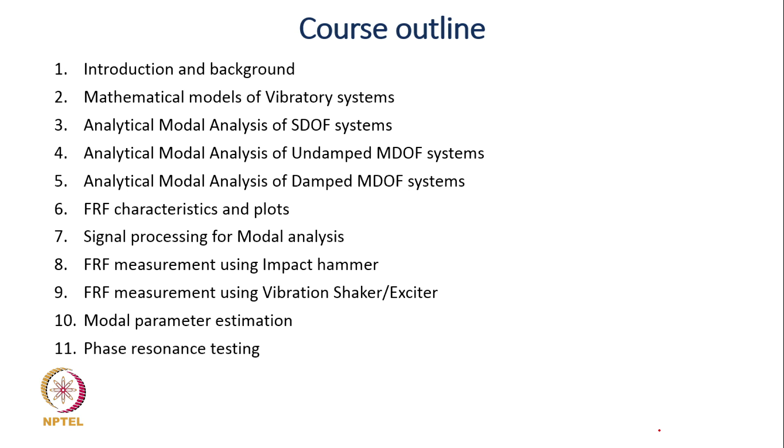Then we will look at how FRFs can be measured using an impact hammer. Then we will look at FRF measurement using a vibration shaker or exciter, and then how the FRFs are curve fitted to obtain modal parameters. So we will look at modal parameter estimation using frequency response functions and impulse response functions. Depending upon the available time at the end, we will also briefly look at phase resonance testing, operational modal analysis, and some applications of experimental modal analysis. So this is broadly the topics we are going to cover in this course.

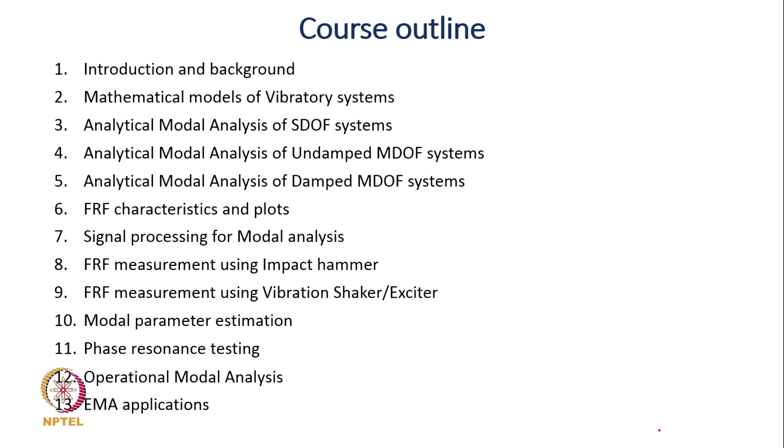So let us now address the first question, that is, what is experimental modal analysis? In order to understand what is experimental modal analysis, I think we need to first understand what are natural modes of vibration.

What are natural modes of vibration? The natural modes of vibration of a system are the principal or distinct ways a system can vibrate naturally with harmonic motion. So, the system can vibrate naturally or freely in a way which is not a natural mode of vibration. Free vibration which is not a natural mode is possible, but there are distinct ways in which a system can vibrate freely with harmonic motion.

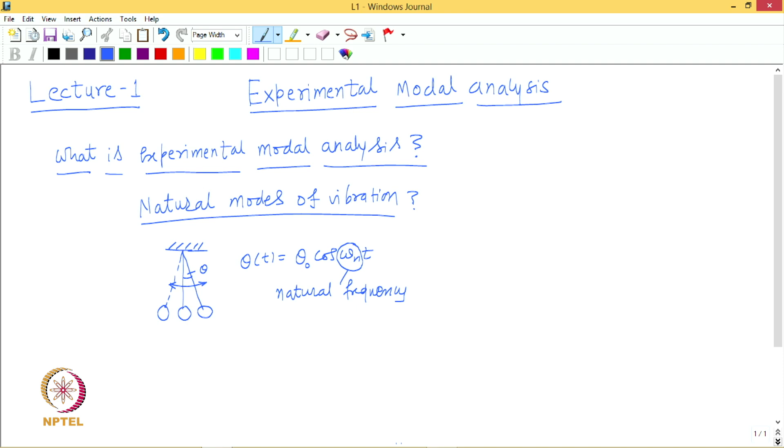Simply because the pendulum once disturbed is no longer excited further. So, it means it is under free vibration, and the frequency in this state is the natural frequency of the system. Now, this pendulum requires only one coordinate theta to specify its displaced configuration, and therefore, this system is referred as a single degree of freedom system. And this is such a system, and any single degree of freedom system has only one natural frequency, right.

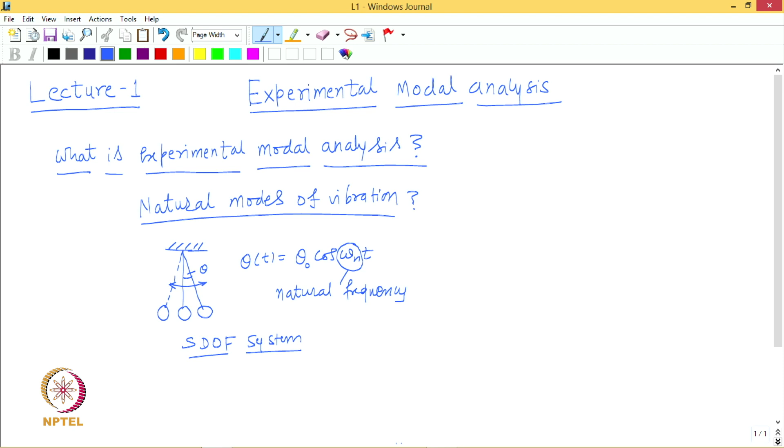Let us take another example. Let us take a system like this, in which we are connecting two identical pendulums, say by a spring like this. Okay, so there are two pendulums which are identical, and we are connecting it by a spring. Now, this system has 2 degrees of freedom, because the displaced configuration of the two pendulums at any point of time requires two coordinates theta 1 and theta 2 to be specified. So, this system has degree of freedom 2.

Now, this system has two natural modes of vibration. One of the natural modes is this, in which the two pendulums are displaced by an equal amount, say if I call it theta naught, theta naught. So, in this case this system vibrates with natural frequency omega n1, right. So, when the pendulum system goes to the other extreme of the cycle, they occupy a position like this, and they keep on oscillating like this.

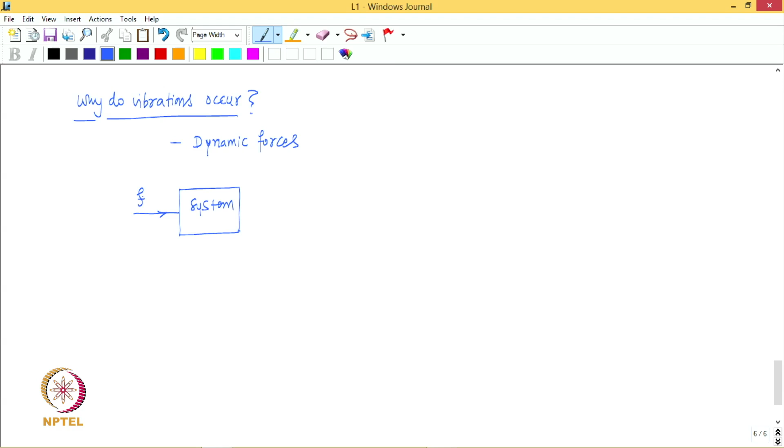Let us again look at the input output model of a system. Let us say we have a force f on this, and if the force is static, which means that it stays constant with time, then the displacement it produces under the steady state is also constant with time.

Okay. It is also constant with time. Of course, there may be some initial transient which we may ignore at the moment. So the displacement is constant with time. So you have a static displacement, or static deformation.

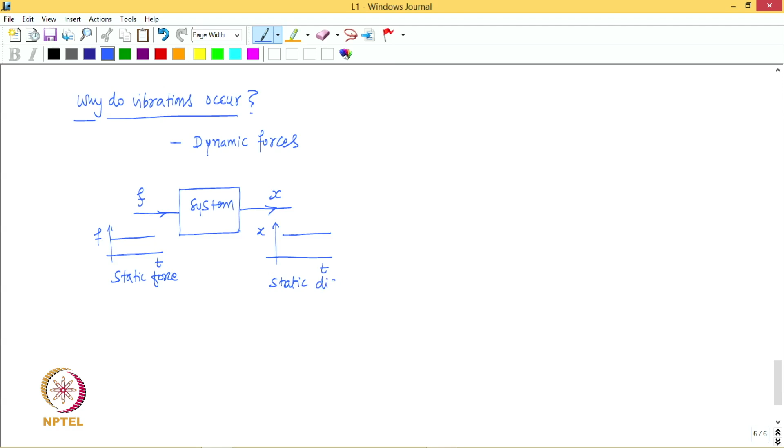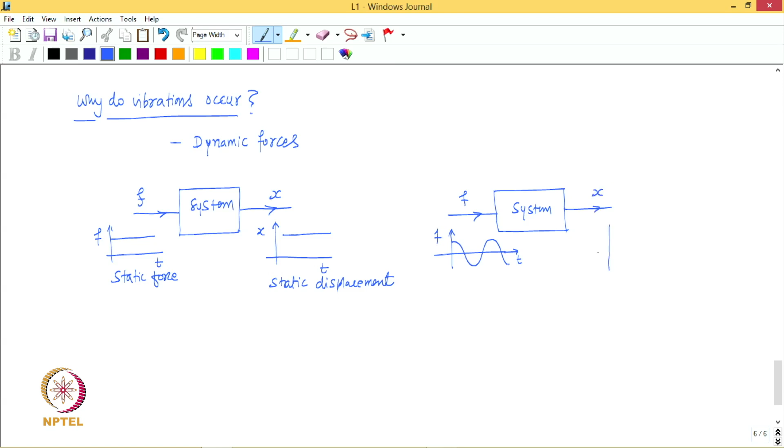But let us take the case where this force is not static. The force we have is, let us say, varying with time, something like a cosine wave. Then we see that the displacement it produces also is going to vary with time at the same frequency, and because the force here is varying, the displacement x is also varying.

So, it means the system goes away from its static position to some extreme, it returns back and goes to some other extreme on the other side, and this process repeats, and that is nothing but oscillation. So, you can see this is nothing but the oscillatory motion, and nothing but vibration.

Okay. So, we understand that if the force is oscillatory, and such forces we refer to as dynamic forces, dynamic forces which vary with time, they produce what is called vibration, or we can also call it dynamic response. The response is also dynamic.

The dynamic forces need not vary only in this manner shown here, like a cosine wave. They can vary in a much more arbitrary and random manner. For example, the forces may be like this. So, that is also a dynamic force, and the vibration it would produce would be quite irregular and varying in a quite random manner like this. So, depending upon the forces that are acting, the vibration produced will depend on that.

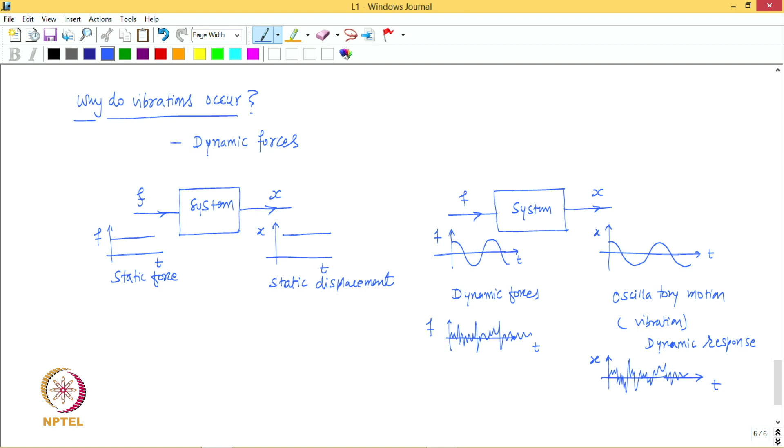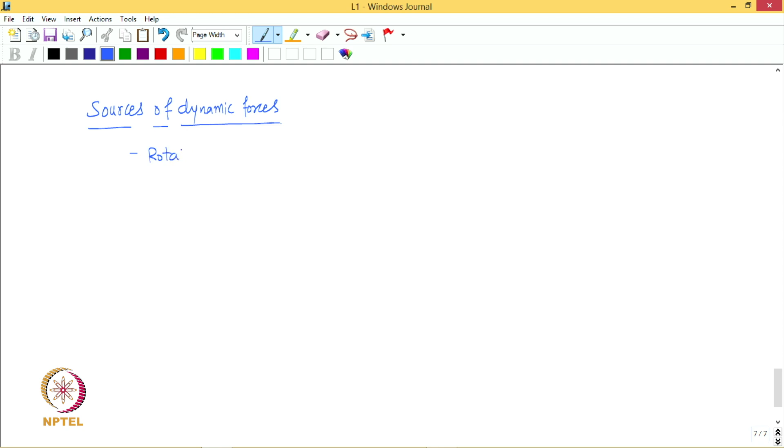So, therefore, the vibration occurs because of dynamic forces. But what are the origins of the dynamic forces? What are the sources of dynamic forces in practice? So, one of the important sources is force due to rotating unbalance. Many machines have rotating elements, like for example turbines, fans, centrifugal compressors, motors, generators.

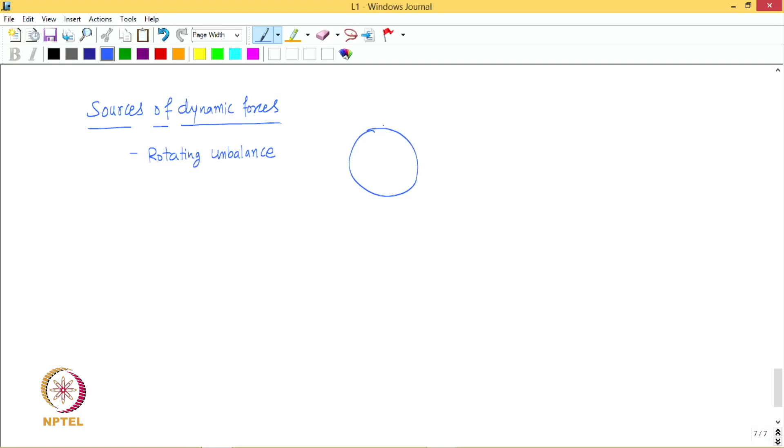And these rotating elements have their center of mass. We would ideally like the center of mass of the rotating element to be at its axis of rotation, but that is very difficult to achieve. So, let us say this is the rotating element on this shaft, and this is the center of mass. The center of mass may not be exactly at the axis of rotation. So, this distance is called eccentricity.

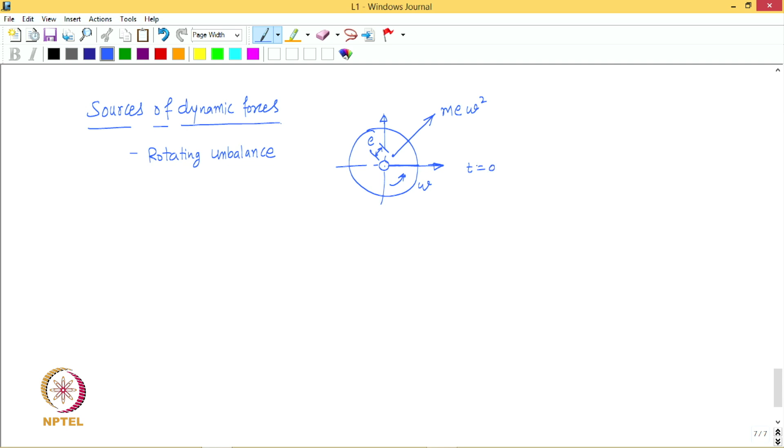If m is the mass of this rotating element and the angular velocity is omega, then m e omega square is the centrifugal force that it creates. And this force is a rotating force, so it is going to change direction. It has two components. If time t equals 0 coincides with this axis, then this angle is omega t, and therefore this force will be m e omega square cos omega t, and this force will be m e omega square sin omega t.

So, effectively what is going to happen? You have two forces acting on the whole system, because this force will be acting on the shaft carrying the rotating element, and the shaft being supported in bearings, the force will be transferred to the bearings in the form of reactions. Those bearings are mounted in the housing of the machine, so the forces will be transmitted to the housing of the machine.

So, effectively that machine is going to shake because of these forces, and in turn the whole machine and different elements of it will be set into vibration. So, therefore, rotating unbalance is a very common cause of vibrations in structures and machines. Another source is reciprocating unbalance.

Right. So, many machines have reciprocating parts, for example, IC engines, right, they have a slider crank mechanism, and therefore, if I show here, this is the slider or the piston, and this is the connecting rod, and then we have the connecting rod, crank, and then the bearing, right, crankshaft.

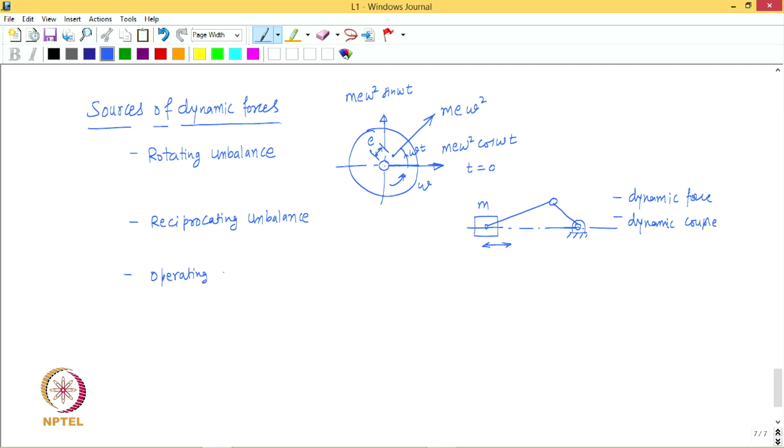Then we have operating forces, right. So, machines, when they are operating, because of the operation of the machine, depending upon the kind of machine, forces may be generated, right. For example, in metal cutting, say in a milling machine, right.

So, when the milling cutter removes the material from the surface of a plate, let us suppose, then it applies cutting forces, right. And those forces generated in cutting act not only on the workpiece, but they also act on the milling cutter or the tool, right, cutting tool, and the cutting tool is held in a tool post that is also subjected to those forces, and then the whole body of the machine is also subjected to the forces.

And because these forces again are dynamic, they are not static forces, they vary with time, and therefore, the whole machine and different parts of it are subjected to these time varying dynamic forces which may lead to the vibration of the workpiece, the tool and the rest of the machine. So, that again is undesirable, right.

The other example is the forces in forging, right. In a forging machine, the hammer applies a very huge impact force on the workpiece to produce the forging, and it is a very, very high impact force, right. In a short time a very huge amount of force is applied, and that basically shakes the whole machine, the foundation on which the machine is installed, and therefore it causes the vibration.

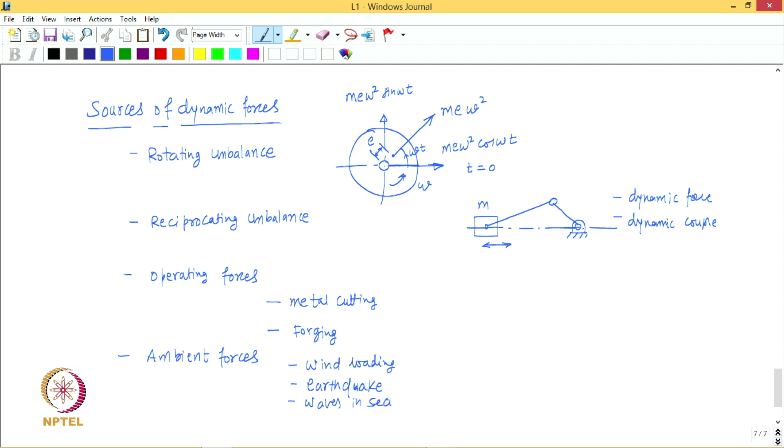Waves in sea, for example, are another source of ambient loading, which is basically relevant for ships, right. So, therefore, waves impinge on the hull of a ship and they excite the hull, causing its vibration.

Another ambient excitation could be acoustic. So, whenever there are sound waves, acoustic waves are basically the waves created in any medium. It could be air or water or liquid or solid also. So, the waves created in any of these media travel, they propagate in different directions, and these are nothing but the acoustic waves, and therefore, especially the waves created in air, they can impinge or they

do impinge on the structures with which they come into contact, and those structures in turn are subjected to the acoustic pressure, and because pressure is fluctuating, the load generated because of these waves on the structures is also fluctuating, and hence constitutes dynamic forces on those structures. So, therefore, sound or acoustic waves can also excite the structures.

Then there could be excitation also due to fluid flow in pipes and ducts. So, many systems and machines have fluid flowing in pipes and ducts. So, the turbulence in the flow creates forces on the walls of the pipe and duct. The variation in the geometry may also lead to forces. So, all those effects may also cause excitation of the structure of the pipe and vibrate it.